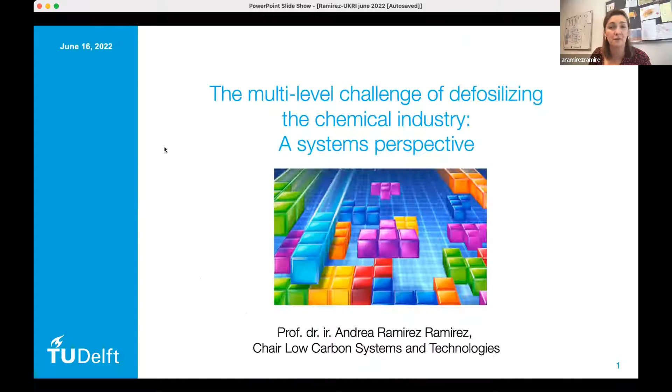I will not spend a lot of time on an introduction, but we know why we are doing this. The amount of greenhouse emissions that has been currently emitted into the atmosphere is large and increasing, despite coming out of a COVID situation.

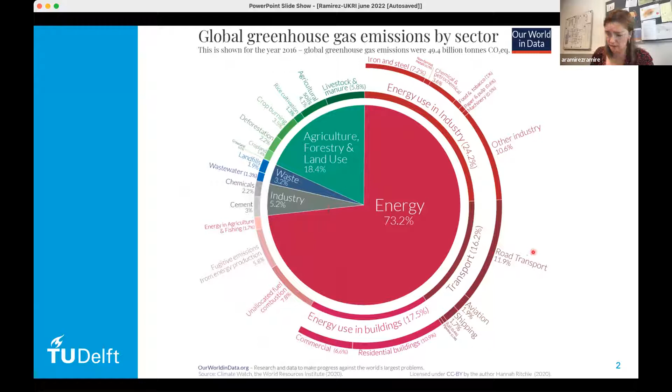If we look a little bit at... let me just have my pointer as a laser pointer. I don't know why it's doing this.

I just borrowed some of the slides from the IPCC sixth assessment report.

I'm not going to go again into details, but it's quite clear that if we want to avoid large impacts from climate change that we are already feeling today, we need to decrease our emissions.

We hope to be able to decrease it to keep a target increase of 1.5 degrees. 2 degrees is already taking us to quite a lot of impacts. And this figure just says, what's important is...

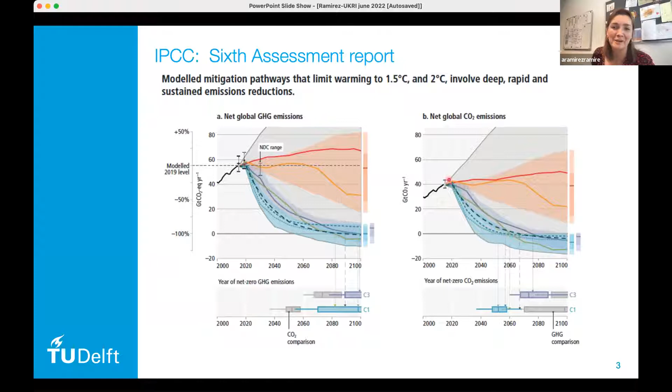Regardless of whether you are going to reach net zero 5 or 10 years later, we need to decarbonize very, very soon, and we need to do that in all sectors of the economy. So unless we have immediate and deep emission reduction, 1.5 degrees is beyond reach.

Some people are already concerned about whether 2 degrees will be within reach. So that's a little bit of an alarming situation.

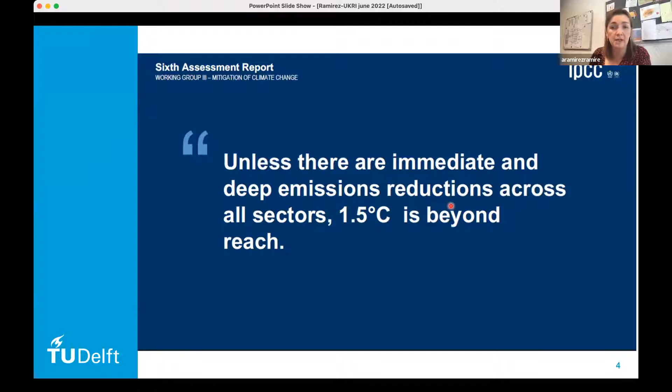And we also know that there is no silver bullet. We know there is no one option that will take us there, but it's a combination of options that makes the system, or the challenges, a little bit more complex.

And this is what in the 6th assessment report they have said industry needs to do: using materials more efficiently, reusing, recycling, minimizing waste, using low to zero greenhouse gas production processes. And they also recognize that achieving net zero is very challenging for the industrial sector, so there will be a need also for negative emissions, even if it's just to do some compensation and later to actually take down historical emissions.

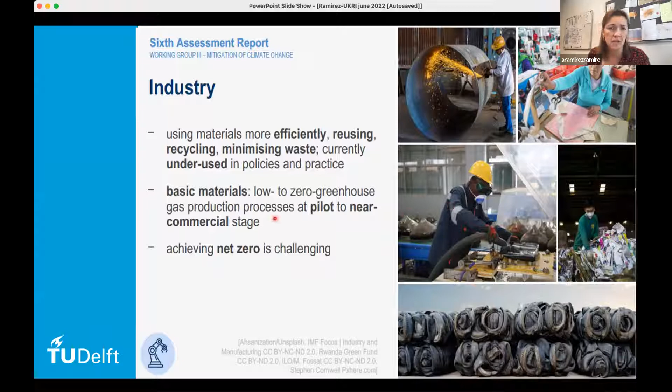Now, these are a lot of options. I'm not going to focus on all of them, but I'm going to focus most of this talk on something that UKRI is also working on, and it's around defossilizing the chemical industry by using alternative sources of carbon. And I'm not using the word decarbonizing on purpose, because most of the processes that we have today contain carbon - the paints, the rubber, the fabrics, the plastics that we use, they have carbon in the molecule. So what we want to do is change that source of the carbon molecule, to have the carbon not coming from oil, natural gas, or coal, but maybe using biomass, or can we use CO2, or can we use, for instance, waste? Plastic waste is one option that is being currently discussed.

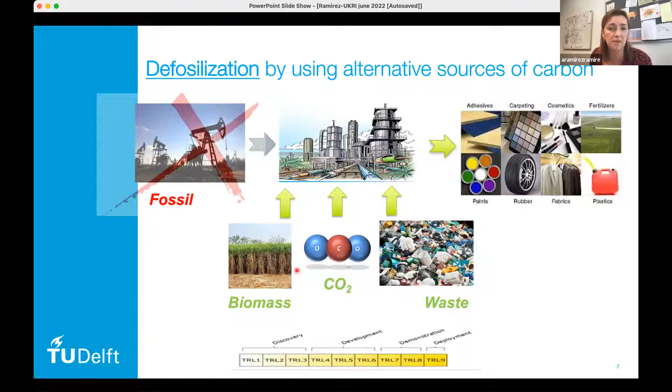All these new technologies - and you have here the technology readiness level, which will tell you how far along the technology is before commercialization - are what we call early technologies. Many of them are just in the lab. Some of them are in pilot and just moving towards demonstration, but not yet there. So it's a bit of a rush trying to see how can we take those promising technologies, and what are the impacts of doing so.

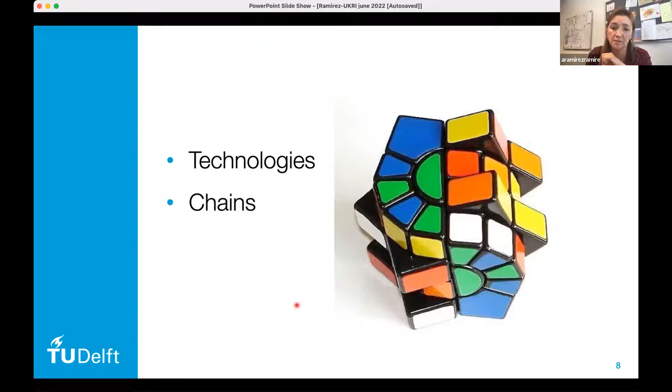So what we are aiming to do on one side is developing technologies. We also need to implement value chains that take from raw material to product. Some of them we can use value chains that are already available. For many of them, we will need to design new value chains. And then we need to have full systems. And by full systems, I'm speaking beyond the company - I'm speaking about the logistics, where the raw materials come from, how my interaction is with other systems, enabling infrastructure that will be required, etc.

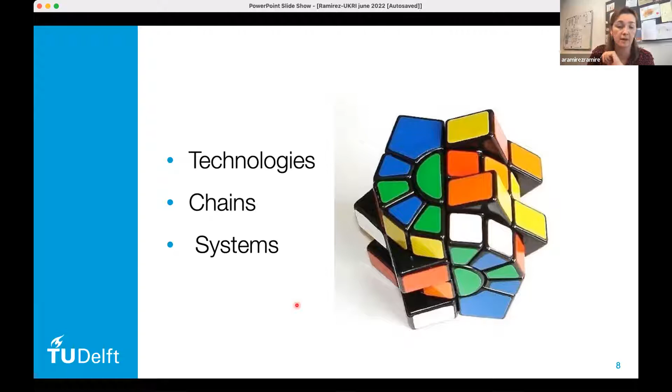Now, I love the work we do, but I know UKRI also does it. It's called ex-ante technology assessment, and it's about whether we can do something with the knowledge we have for those technologies at lab level, and use that knowledge to really explore what will be the future performance of those technologies. And we do so in order to provide feedback to the technology developers and to policymakers on how to actually develop the technology further. And to do that, we do a combination of process modeling to scale up results from lab to industrial scale. We assess the economics, we assess the life cycle performance, and we also do uncertainty analysis. We tend to do ex-ante technology assessment by taking a value chain approach, that is, to look from raw material to where the product finishes, if possible.

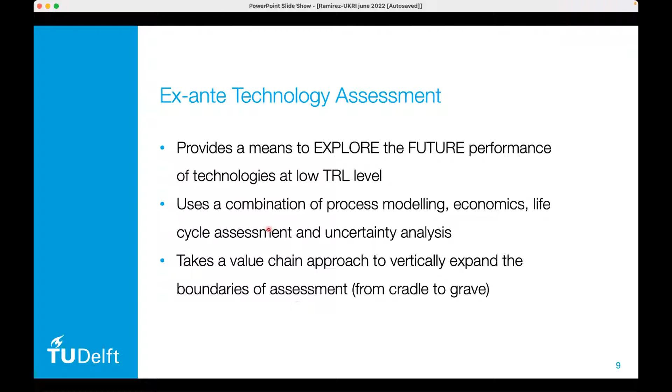Now, I don't know why my cursor is not working, but this was a bit of a disclaimer of what ex-ante technology assessment doesn't do. So we do provide information - it's an exploration of the future, for technologies that are at an early stage of development. That means that we don't know a lot of things. There are a lot of question marks when we are developing the technologies, and therefore there are inherent uncertainties about the information that we are putting into the models.

The highly inherent uncertainty means that the results are not aimed to be looked at to the decimal point. It's not about the performance - I have something at lab scale, at a 50 centimeter by 50 centimeter area, I'm going to design something that works at industrial scale, and I can tell you exactly how much it will cost to the decimal point, or how much energy it will consume to the decimal point. That, I will argue, is not realistic and it's not needed. What we are trying to do is to gain insight into where the bottleneck is, where the problems are, what the order of magnitude is, and can we do something about it, recognizing that there is a lot of uncertainty and a lot of variables that can influence the result. So that is where the challenge comes from.

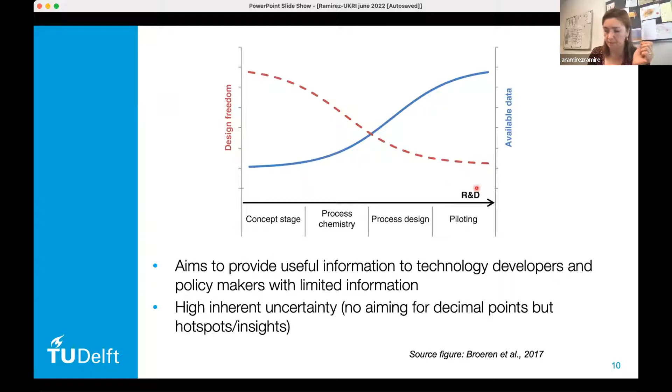Now, that means - and I am part of the E-Refinery Institute at TU Delft, and we look at the transformation of carbon into molecules using renewable electricity - this is one of the typical illustrations that I have.

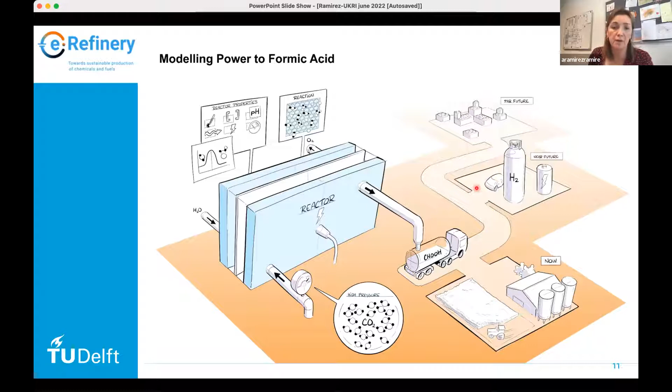And this is just - we are going to go from CO2 to formic acid using an electrochemical reactor. And that's how we picture the transformation for the public. And when I see this and go into the project, the type of questions that I tend to ask are a little bit like this.

So it's not only the reactor what I'm concerned about. I'm concerned where the electricity is coming from, what is the quality, the cost, where is the water coming from, are critical raw materials used, what is the quality of the product, do I need downstream processing to get it to market standards? What is the infrastructure? Do I need new pipelines, electricity, roads? Do I transport by ship? Under which timeline? What are the CO2 impurities that I put into the reactor? Those are system conditions. So even if your reactor is working perfectly in the lab, those are the things that will determine whether or not it can be implemented in practice.

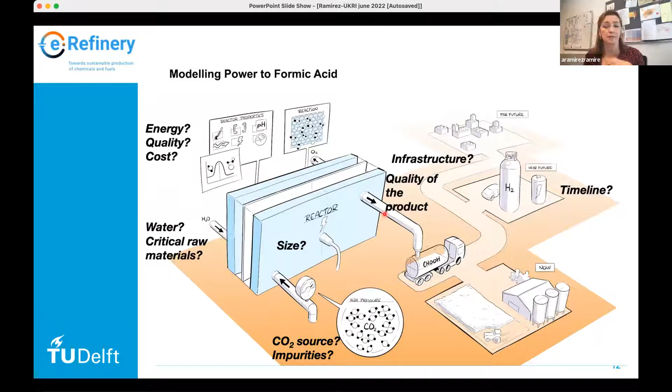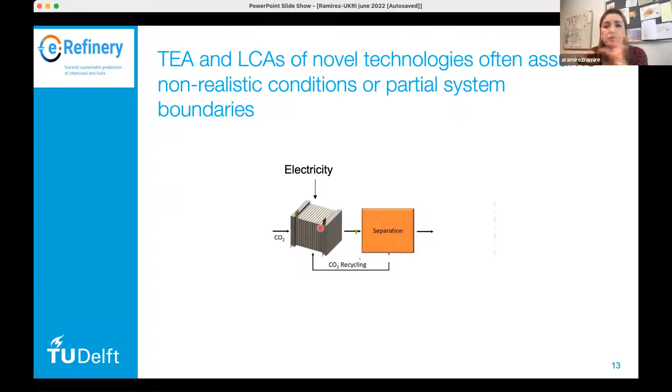So what we notice when we look at a lot of techno-economic and life cycle assessments of these low-TRL technologies is that they tend to assume unrealistic conditions or partial system boundaries. And what I mean by that is, for instance, in the case of electrochemical conversion of CO2 into product, many studies assume that the energy is simply there.

I have seen people speaking about an unlimited amount of energy that people will pay to provide. Yeah, maybe at some point, some time, but not on a permanent basis, because a power company still wants to make profit. Or they tell you the electricity is renewable, coming from intermittent sources, while the assessment actually assumes 24/7 operation.

They tend to assume that the CO2 feed is free, has no environmental footprint, and is pure. Some studies don't take into account that you need to do a lot of cleaning of the product coming from the electrolyzer to actually get the final product. And some LCAs assume that the use phase is exactly the same as the petrochemical counterpart, which may be true in some cases, but if you change the way you use the product, that may not be the case.

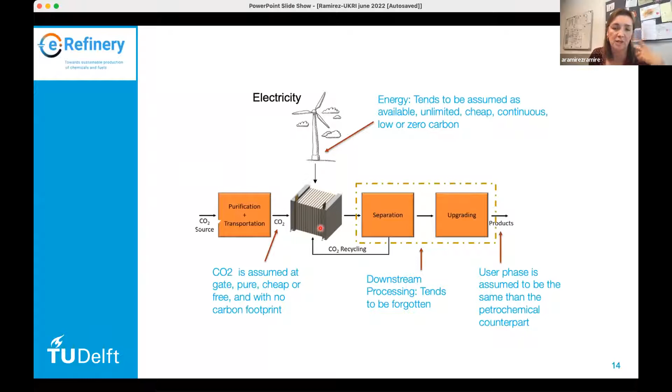Now, I'm not going to go through all of them because there are too many, but some of them just to give you food for thought, because these are system challenges. One of those is: does impurity in CO2 matter? Now, my answer to that is, it depends what you want to do with the CO2.

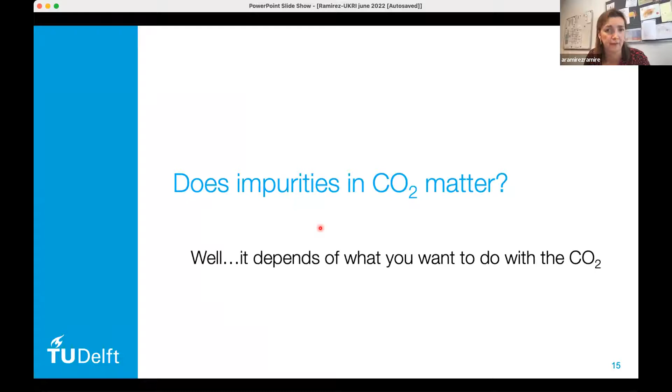These are typical compositions you'll find in literature of fluid streams coming out of a capture unit, whether after a coal power plant, a natural gas power plant, a cement plant with post-combustion capture, a refinery, a bioethanol plant, or even direct air capture. And you see it changes a lot. So if you want to do something like mineralization, converting the carbon into carbonates, that is generally the least sensitive to impurity. You can even put flue gas there, no problem.

But if, on the other side, you want to do electrochemical conversion of CO2, then questions come up. Can I put mercury there? If I speak with a lot of experts, they say, please, no mercury, not even at the ppb level. Can I put sulfur there? Can I put NOx there? Can I provide chlorides, since that comes from biomass CO2?

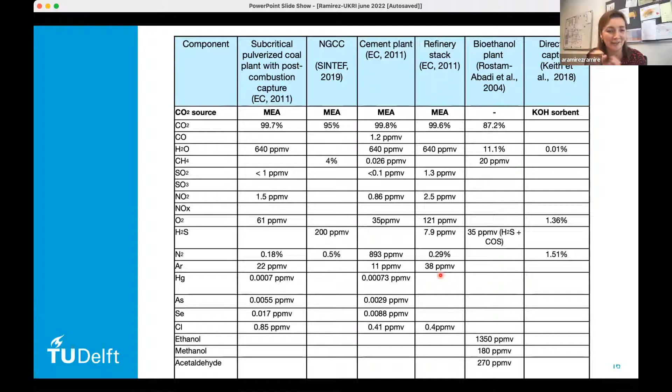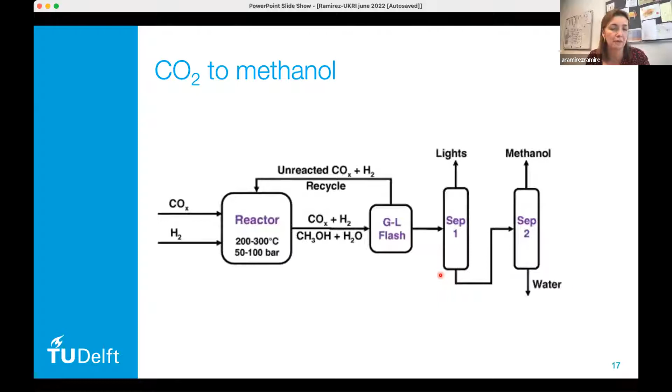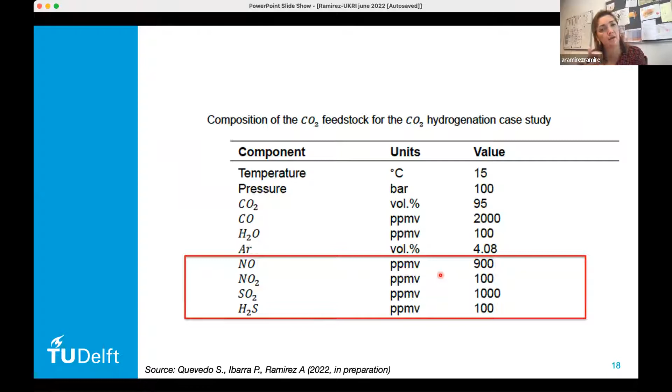So we did a little bit of an exercise to try to compare two different routes to produce methanol. We assumed a CO2 feed with these impurities, and looked at how it would affect, for instance, the techno-economic assessment. I'm not going to show you all the process design and techno-economic analysis, but for this webinar, just to tell you that it does matter, at least in this first assessment.

So we were comparing those two systems to produce methanol, one using CO2 hydrogenation and the other going via gasification of plastics to methanol. And what we found, when we wanted to use CO2, is that the CO2 purification system we needed was around 25% of the levelized cost of methanol. That is a large amount for a novel technology. Whether it's 25 or 26 or 30 is a little bit irrelevant, but it's not insignificant.

This can be done with technologies we have today, that's not a problem, but it does affect your CapEx, it does affect your competitiveness, it may affect which source of CO2 you want to use. And if you change the source of CO2, you may want different infrastructure, different regulations for CO2 transport—there are many system implications. So all I'm saying is that is an aspect you cannot overlook.

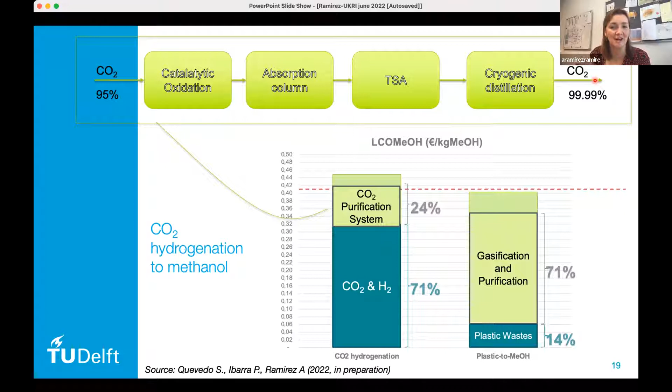And we need people to actually do experiments with impure CO2. That will be a call for all of you doing lab work: try CO2 with different impurities. The more robust the technologies are, the fewer problems we will have at the system level.

The other thing people are doing a lot, and we are discussing a lot, is intermittency. So we hope that in a couple of years—maybe I'm a little too optimistic—but by 2050 we will have in Europe a fully renewable electricity system. Let's assume that is the case. Then the question that comes to mind is, what does it mean for new processes?

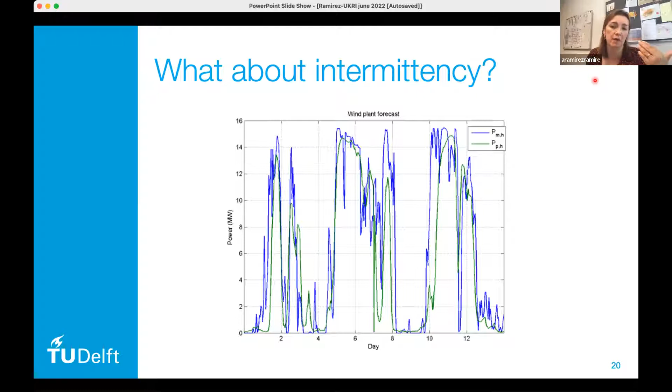So what happens if we have a lot of these CO2-based processes, electrochemical conversion running on electricity, and you have this intermittency? Can we evaluate the impact, and can we design the process accordingly? To do that, we got a project partially subsidized by Shell and the Dutch government to look at what flexibility means when designing flexible novel chemical processes, how different levels of intermittency affect economics and environmental trade-offs, and how significant system conditions are for this.

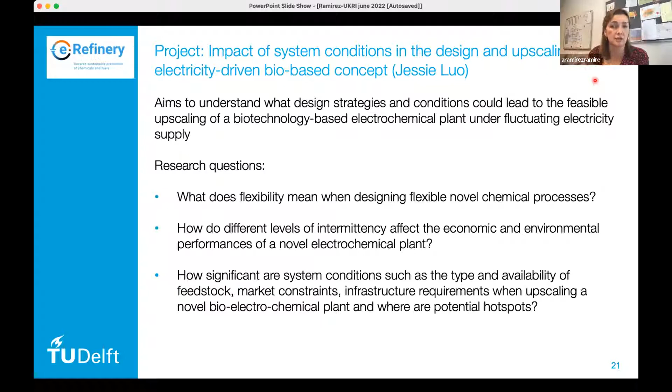Doing this, we did a review on what flexibility means for the chemical industry. We found quite a few problems in terminology—people using the same name for different things, or different names for the same thing, which makes it hard to understand what people are referring to. So we published a paper on what flexibility means and how we could develop a conceptual framework for it.

Now, of all the kinds of flexibility you can have, the focus in this webinar, what I'm going to tell you in the next slide, is about volume flexibility. That is because in an electrochemical reactor, if you vary your electricity—which you can consider a feedstock to the reactor—then your output will also change. So the ability to vary throughput, we define as volume flexibility.

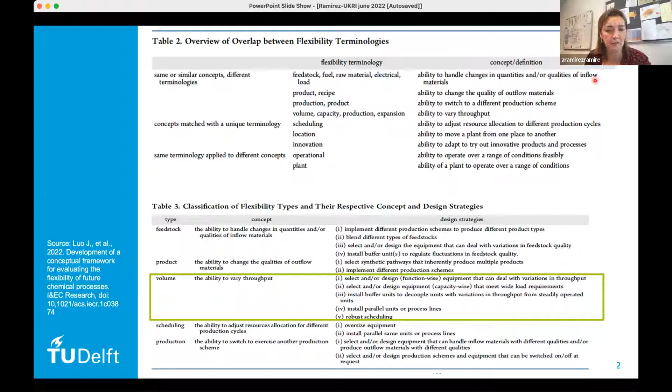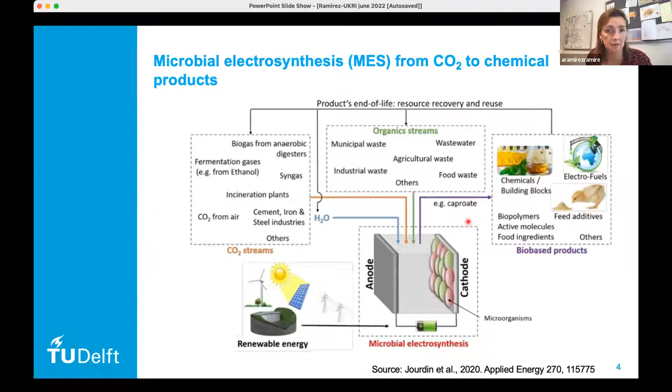At this moment, JC, my PhD student, is working on microbial electrosynthesis from CO2 to chemical products, especially caproic acid. This technology is developed in the Faculty of Applied Science by the group of Ludovic Jourdin, who is doing the lab work and scaling up. So you basically put in renewable energy, CO2 and water, and at the cathode you have microorganisms that do the conversion, producing, for instance, caproate or caproic acid, as we are currently analyzing. We are using this as a case study to understand how to design flexibility.

And then we say, let's assume that electrolyzer—which is an assumption—is completely flexible. What happens afterwards? What happens with the rest of the plant? Will that be a bottleneck? And the answer to that question is yes, it will.

So you have to assume, for instance, these bio-based products produce very diluted products—in this case, 10 grams per liter of caproic acid—and you need to sell it at 99%. So if you want to do that, you actually have to remove a lot of water from the system.

To do this, we use liquid extraction to be as energy efficient as possible. And then we spent, I think, a year trying to understand how to model the flexibility of the different units to find where the bottlenecks are. Here you see which units consume the most heat. It's not such a simple system, and the economics are also problematic.

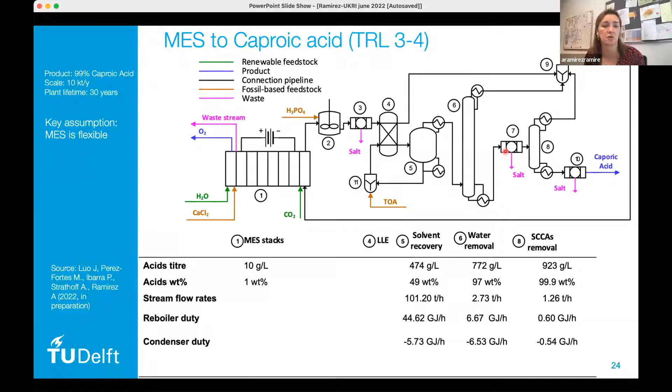When we wanted to, that's what she did, she changed the amount of electricity going into the system, which changed the load rate going into the different equipment. As a consequence, your equipment is not working at design capacity, so it's working at different capacities, and every piece of equipment is different from others. Some equipment are more resilient, while some you really need to keep close to the design system.

Jessie was this week at the ESCAPE conference in Toulouse presenting the results of this part of the work. What we found is the volume flexibility of the downstream processing was 70%. That means I can vary my load rate by 30%, and the equipment will still work, but it will not be as efficient. It will have a cost - you are operating a bit more inefficiently, but you could operate.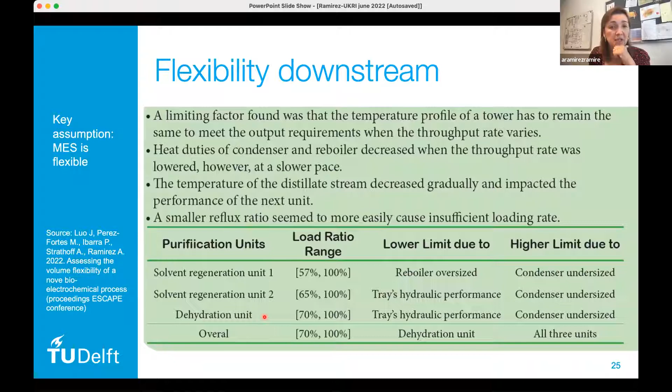Below 70%, my equipment starts having really big problems, especially the dehydration unit, and therefore I needed to shut down. If you consider a profile like this of a wind plant, without doing anything about this design, you will be shutting down 3,700 hours a year. If a year is about 8,760 hours, you are shutting down quite a bit of the time, and that will kill your economics. This is a CapEx intensive process, so you would like to run it as much as possible.

So the second question, which is what she's working on at this moment, is: how can we increase the running time if you have this kind of profile? You can do several things. Remember, in our assumption, the MES is flexible, and we only have the possibility of intermittent renewables. One thing we try is to further electrify the downstream processing using electrodialysis as a pre-concentration step, which has been done. The other thing we're doing is adding batteries and buffer tanks to try to minimize the variability, and then do a techno-economic and life cycle assessment to see what happens.

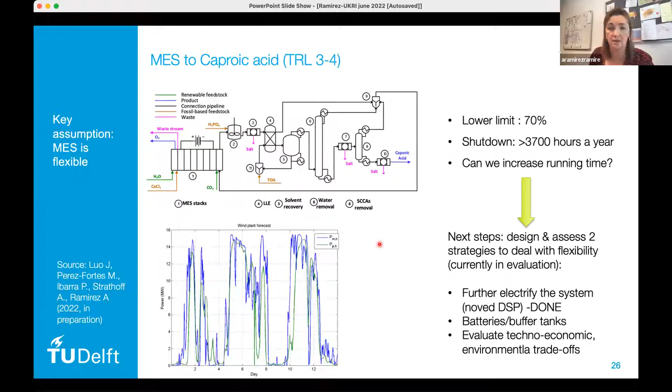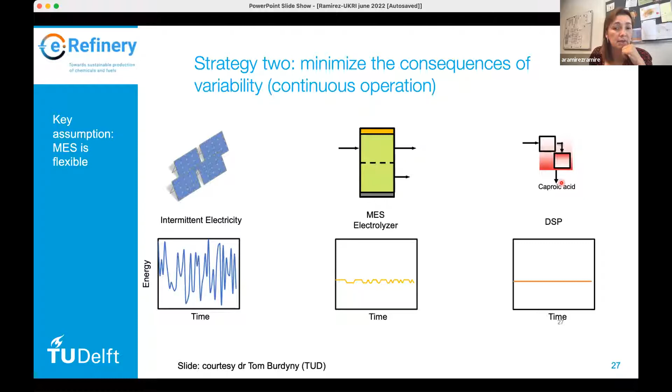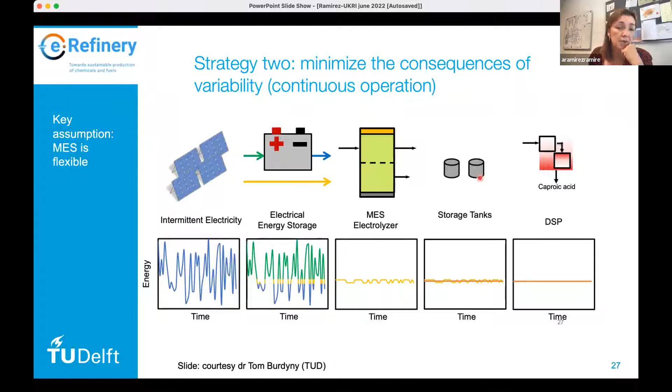So basically, you have intermittent electricity on one side and caproic acid on the other. You have an electrolyzer in the middle that doesn't accept as much variability, so we will put in a battery to reduce the variability, and then some storage tanks. You can make the battery very big and the storage tanks very small, or the battery small and the storage tanks bigger. All of this influences your CapEx and OpEx, and also the physical footprint of the plant - you can end up with storage tanks bigger than the plant itself, which you won't like.

So this is what we are optimizing at the moment, and we hope to have a paper with the results by the end of the summer.

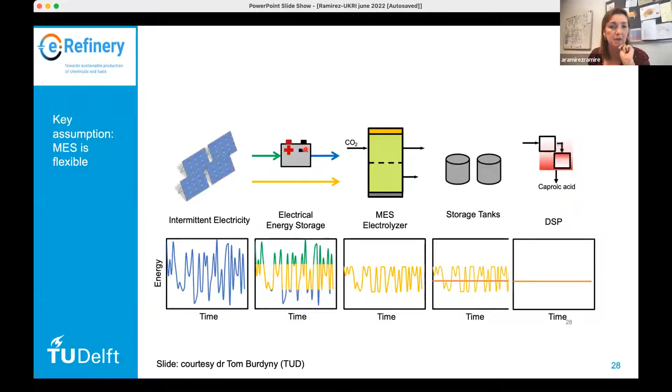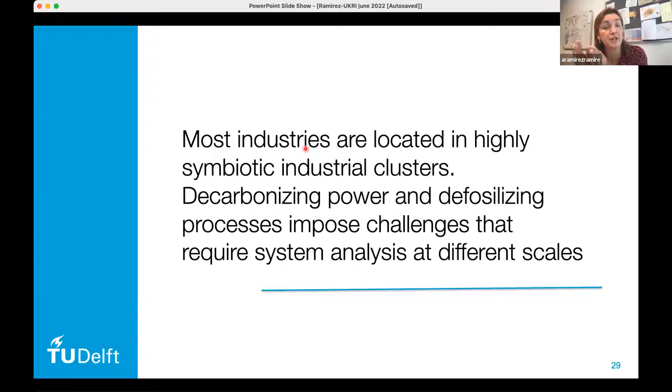Now in the second part of this talk, I've spoken a bit about what happens with these technologies when you treat them as standalone. But reality is, if you go to the UK to different industrial clusters, that's where industries are located. Most industries are located in highly symbiotic industrial clusters - they are not isolated, with some exceptions. At least in Europe, in the Netherlands, they are really clustered. Therefore, decarbonizing power and defossilizing process imposes challenges because of the interconnections that happen at different scales.

So let's assume you do an evaluation of a novel technology for the petrochemical industry. Generally what we tend to do is what we call transmaterialization using a vertical evaluation - you take the current system and have a portfolio of technologies, A, B, and C. You do your techno-economic and life cycle assessment for each individual route, compare the performance, and choose the best one. You say, to replace the fossil raw material, I will use option C, for instance, because it has the lower cost and higher avoidance of CO2 emissions. That's okay, it gives you a lot of insight, this pairwise comparison. It does assume, most of the time, that you are in a green field where you are just comparing two novel technologies.

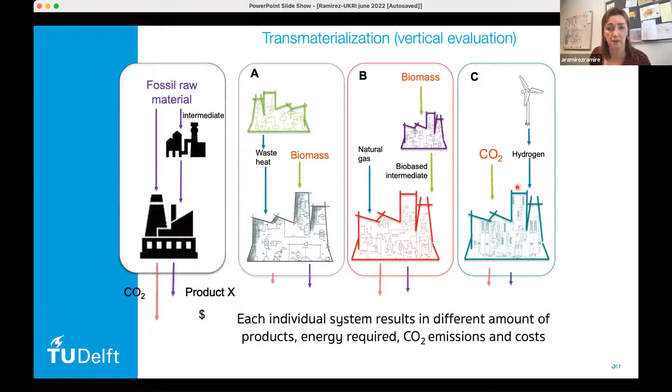Now, what we've done in the next project I'm going to introduce is say, wait a second, this is good, but that's actually not how the industry works today, especially the chemical industry. So this industry I'm trying to defossilize in my system - if I go to the location, I may realize that the company using fossil fuel is actually providing waste heat to a second company, just selling the waste heat, to produce a different product that has nothing to do with my initial product.

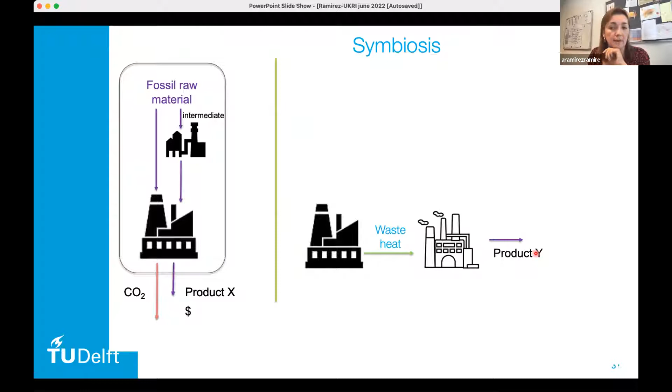It's just selling the waste heat. What happens when I actually take out the fossil process and put a new process, for instance, that would make it out of CO2 and make it with renewable electricity? Well, that waste heat will be affected, most likely disappear. And then what is the second company gonna do? Is it gonna use natural gas in the worst case scenario without CCS? That will imply that all I have done is shift my emissions from company one to company two.

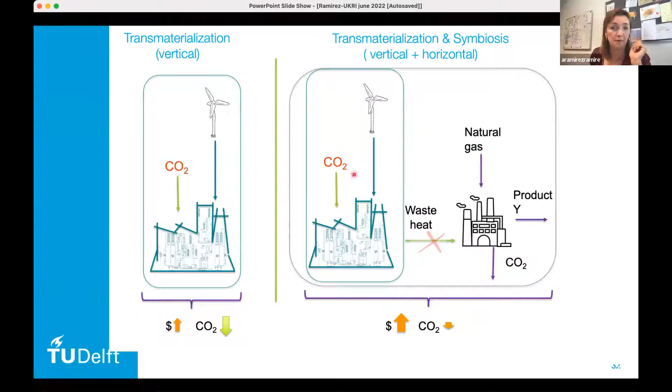Can this be solved by this one using a lot of heat? Of course, but it's not like all the companies speak all the time to realize if I do A, you will do B. It may be that this will be the option of the second one, and therefore you have invested a lot of energy here, but only move emissions at a higher cost at the next site.

So to assess this, we have gotten a project, which is a personal grant I got a couple of years ago from our Dutch Research Foundation, to look at the impacts of using alternative raw materials in industrial clusters. We wanted to be able to assess both the vertical impact from life cycle assessment and the horizontal impacts from symbiosis, and try to understand how flexibility or integration in the industrial cluster or symbiosis could be affected by this transformation.

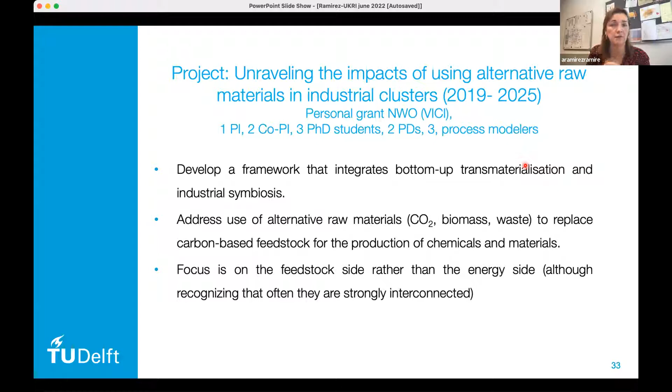So in which way, for what kind of companies, what kind of technologies or new technologies do they affect in the same way, or do they affect in different ways? The focus of this project is not on the energy side, although energy is of course a consequence of the model, but we are really focusing on changing the source of carbon in the cluster.

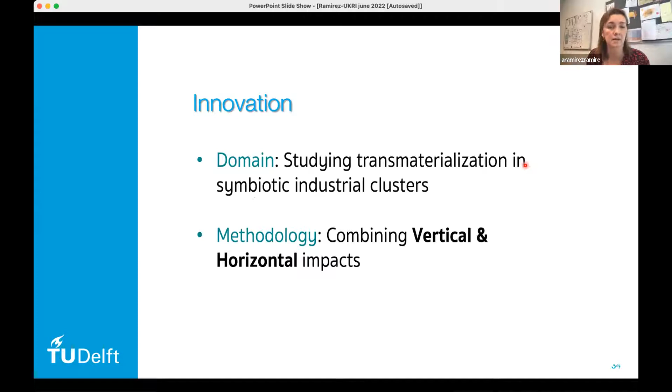So what is new in this project is that we are studying both the vertical and the horizontal impacts, and we are studying the transmaterialization of clusters. And because I have here in my backyard the Port of Rotterdam, that is the example that we are taking as trying to model.

The Port of Rotterdam is only 40 square kilometers in area, and it has 5 refineries, 45 chemical industries, and 5 biorefineries. So you can imagine how concentrated and interlinked everything is.

So the first step, which took us almost 2 years and we have completed by now, we have developed a twin representative model of part of the Port of Rotterdam. We have selected main processes, main products and byproducts that exist in the port. We have kept the production capacities that exist in the port, and we are mimicking the real interactions between different industries that we see in the port.

In our toy model of the cluster, which we are going to call the baseline cluster from now on, we have modeled 6 industrial sites with 20 different companies, around 57 chemicals. We have grouped them as they are grouped also in the cluster in Rotterdam.

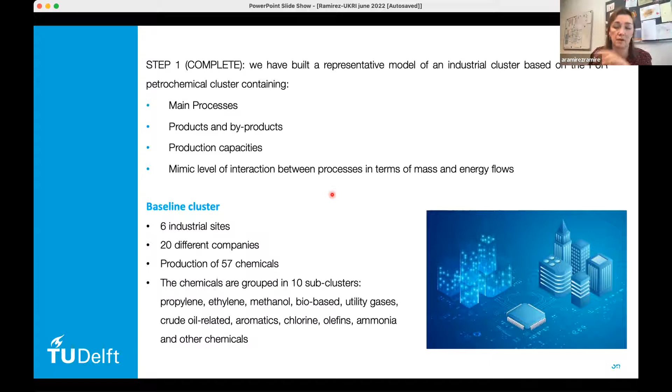I would like you to know several things because it allows you to understand a little bit what we are doing. Every petrochemical process has been modeled as an independent model. So it's not a super model in terms of optimization of the whole cluster, but it's a modular model. Why? Because that's the way the cluster works - every company optimizes for themselves, not for the whole cluster.

We are modeling in Aspen, so it's process modeling bottom up. The individual models already provide us quite a lot of insights because it allows us to get really energy and mass balances of today's condition. We can get emissions, we have area footprints, we have equipment costs, etc.

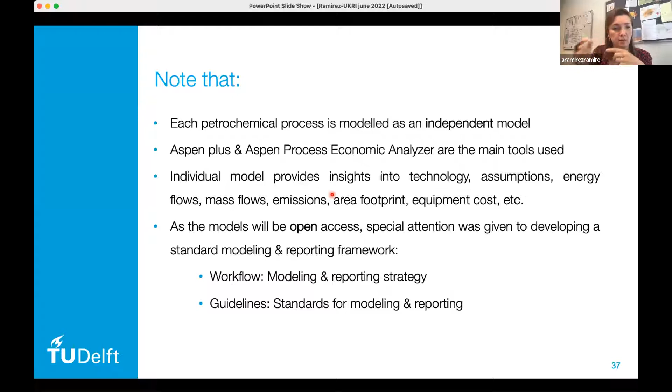And we are going to make the whole model open at the end of the project. Therefore, from the very beginning, we spent quite a bit of time developing modeling and reporting strategies that all the modelers involved in the project are following, so that regardless of which model you open, it has been modeled in the same way. So this is a little bit how the whole model looks like.

I know you cannot read a lot of the boxes, so if you allow me to zoom in a little bit - this is what we call the chlorine subcluster, and the boxes you see here are individual models. All the arrows you see are main products - for instance, chlorine produced in the chlorine company here is being used to produce ethylene dichloride in this company here, and so on and so forth with all of them.

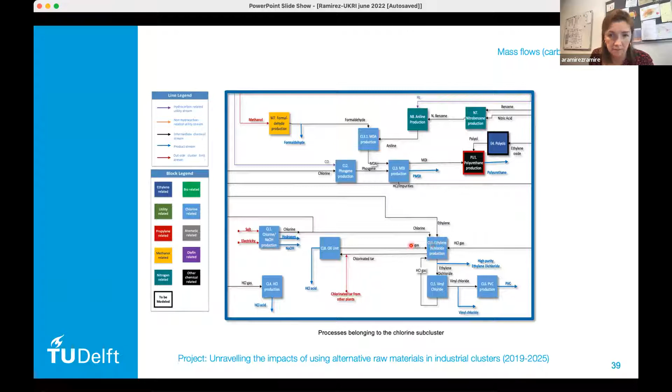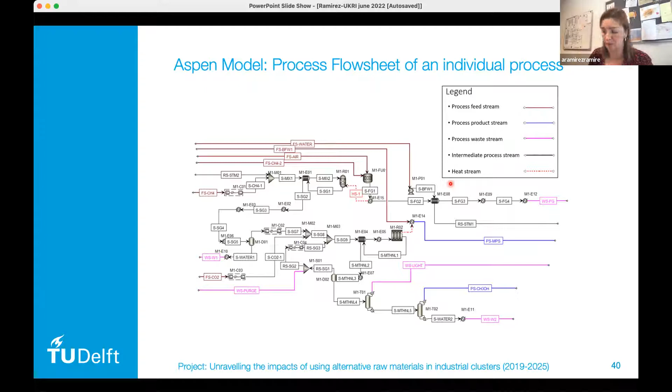So if I zoom in again, in one of the boxes, you will see an individual Aspen model of that process that we have verified to be representative of what we have found outside. So how do we do that?

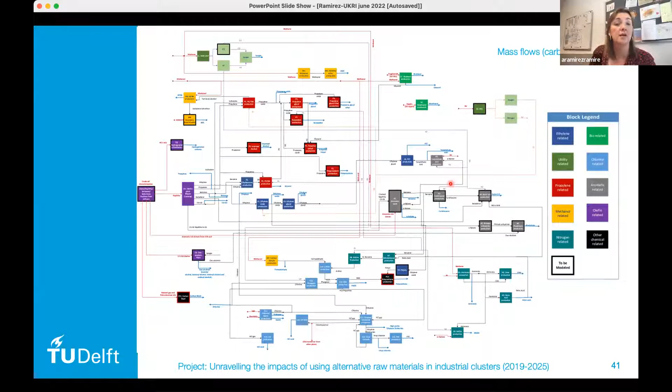We have people looking for several years at all kinds of reports, websites, books, and permits that people ask when you have to submit a plan for a permit from the government. Some of the information is open, and you use all that to try to mimic as much as possible of what's going on.

But in a cluster, companies are interconnected by more than only the main products I just showed you. So Paolo Ibarra, a postdoc in the project, spent quite a bit of time trying to map all the utilities shared between companies in the real cluster so we could mimic them in our toy model. We're speaking about things like oxygen, argon, nitrogen, steam, waste fuel, or water.

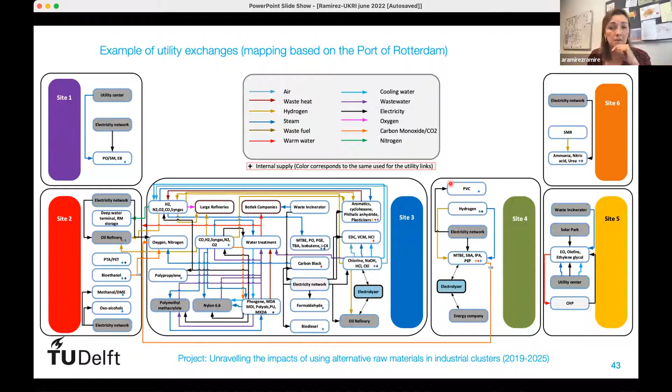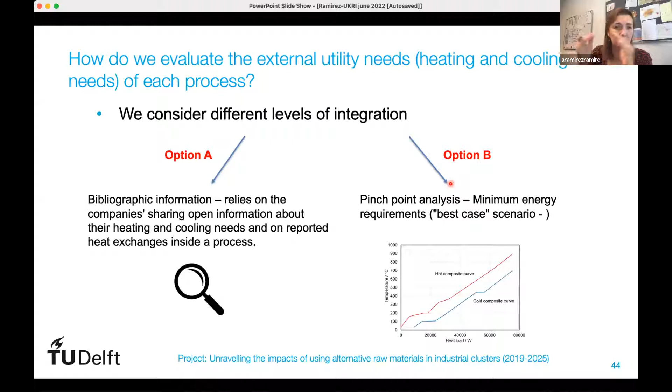It's quite a lot of digging for information to try to reflect the complexity so we can actually assess the impacts. We have energy flows, and we've also modeled the utility islands of the different companies using information from literature, and conducted a basic pinch point analysis to understand whether we are underestimating or overestimating the amount of energy used by the companies.

We compare the energy from the process models with the energy we found in reports from the companies, and try to see when they are close, when people are buying energy, and when people are producing energy inside the cluster.

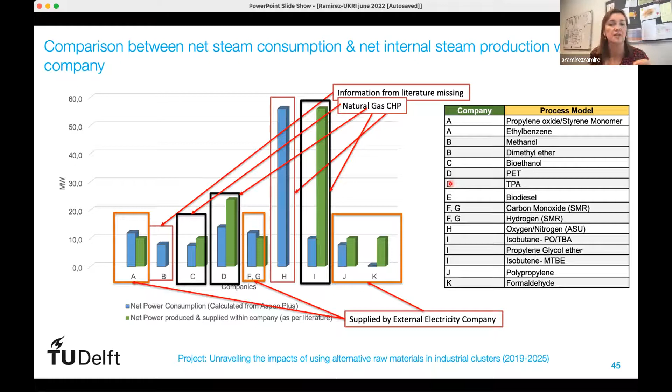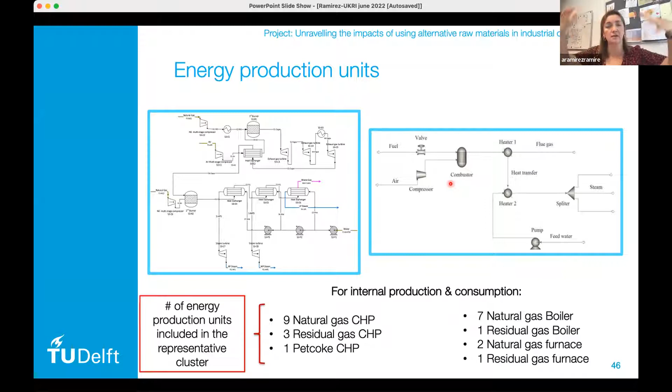Based on that information, we developed 24 models, which are the energy production models in the system. Not to confuse you, but we have individual utility islands that give different kinds of steam or electricity to different companies, and apart from that, we have what is bought from outside our cluster.

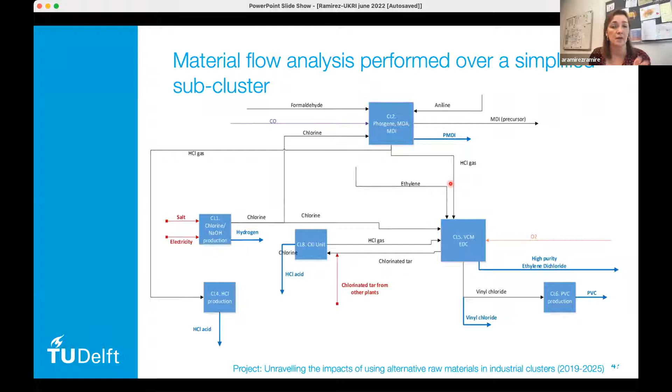Why do we want to do all that? Now that you have this model at that level of complexity, you can do things like material flow analysis for the whole subcluster or the whole cluster. This is an example of a subcluster that was done by Michael Tan.

You see here, for instance, you can do network representation, and with that you can use a lot of graph theory to analyze where the most important nodes are, where carbon is going to, where it's moving from, which are the most interconnected paths, and which are the isolated paths. So you can also do risk assessment.

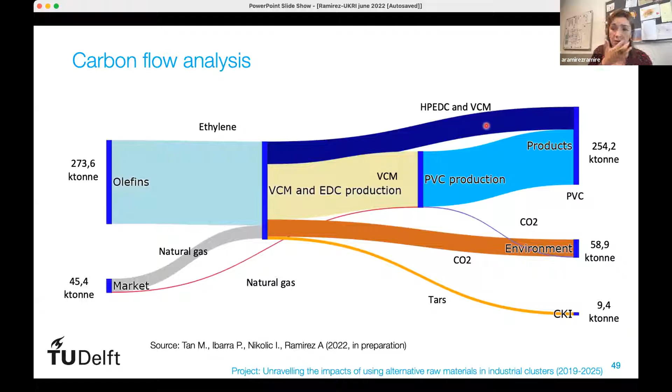You can do carbon flow analysis, telling you where the carbon from the olefins is going, who is using the most carbon. Remember, this is only for the subcluster, but we are able to do this for the full cluster.

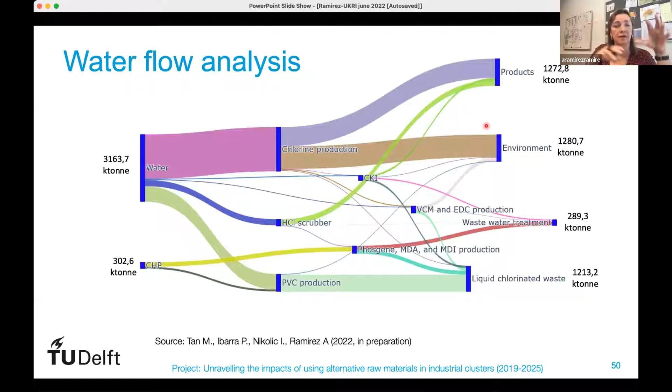We can also do water flow analysis. So you're able to get information at the system level about how things are distributed in this cluster that you could not get otherwise.

Now that we have that, I have three PhD students working on this model. Tonny is going to be looking at decarbonizing chemical building blocks, to see what happens when I change my ethylene or propylene and how the impacts propagate in this symbiotic cluster.

The other PhD, Inna, is going to be looking at what happens when we transform the downstream processes. So instead of changing ethylene directly, I'm changing the way I produce PET, or doing something different on the downstream side, because the impact propagation upstream is different than downstream. At least that is the hypothesis we want to prove.

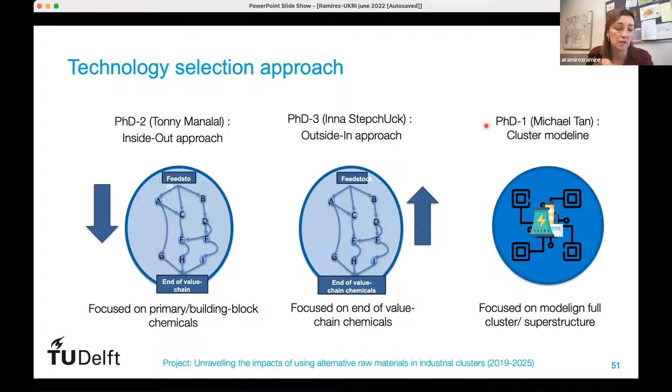And then there is another PhD, Michael, who is joining all this together and doing more full modeling using superstructures to understand how the paths move.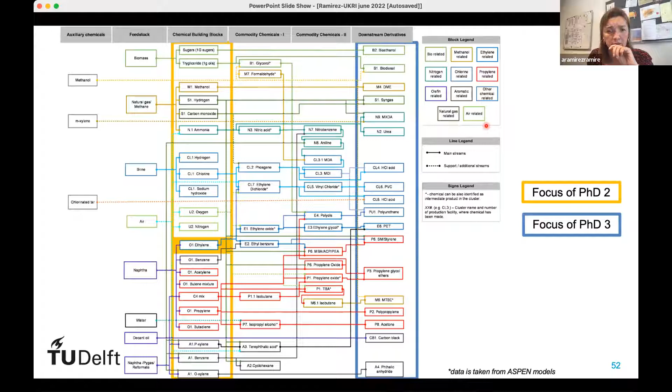So, as I said, Tony is doing the chemical building blocks, and we are starting right now with decarbonizing ethylene. Ina is at this moment looking at MTBE — I think this is her first case study.

What they are going to do is select sixteen products in total: 8 chemical building blocks and 8 downstream derivatives. For each, we select one alternative of how to produce ethylene from CO2, how to produce ethylene from biomass, and how to produce ethylene from waste, then do the same with the different chemical building blocks, giving a total of 48 alternatives you can put in the model.

To do that, you need to develop a pre-screening methodology, because there are many ways to produce, for instance, ethylene or propylene.

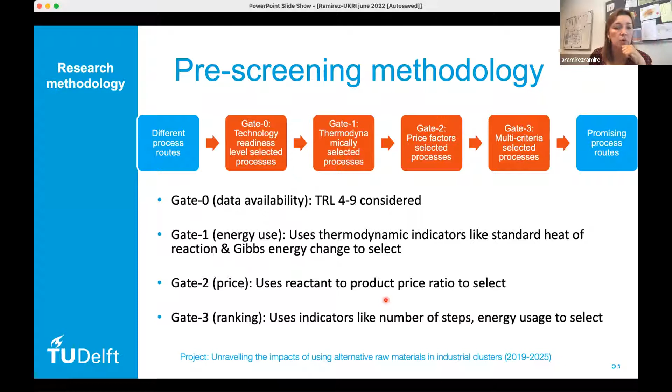We needed to do systematic work on how to select things, because we don't have the resources to model every possible technology needed for the goal of the project. As an example of how complex it could be, this is part of the mapping that Tony Manalal did to understand which pathways were there to make ethylene from alternative sources of carbon. We found 54 possible pathways, and that's part of the challenge the industry has today: how to select from these big clouds.

From here, we select 3 routes: one from CO2, one from biomass, and one from waste. Then we do a model at the same level of detail, Aspen-based like the original one, and replace it in the cluster, and we are developing the methodologies to look at the impacts.

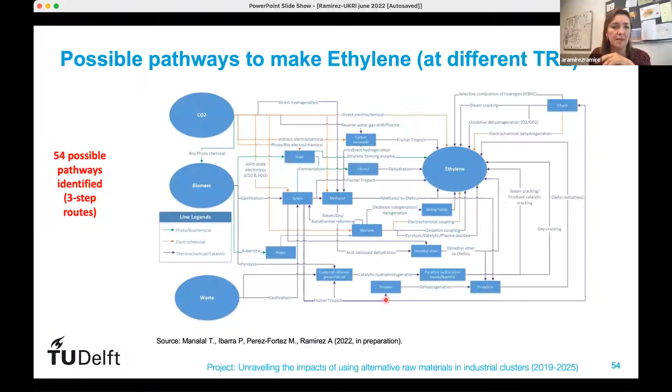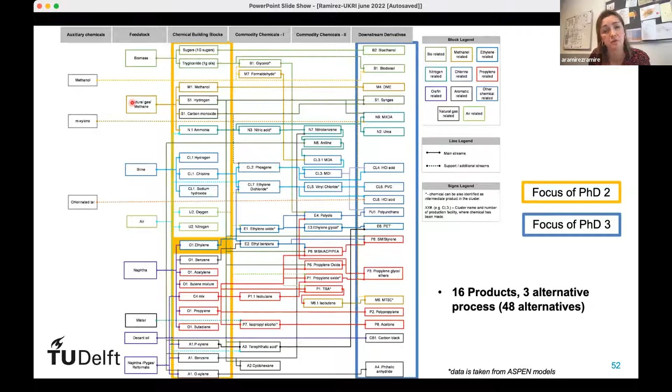Something I forgot to mention: if you look at this cluster, there are things coming from outside it, feedstocks not produced in the cluster, so we have linked the model to a life cycle assessment, to the EcoInvent database. Every product that goes into the cluster has an environmental footprint. We do that because we want to assess whether decarbonizing, de-fossilizing the industrial cluster will actually just increase CO2 emissions outside our system boundaries.

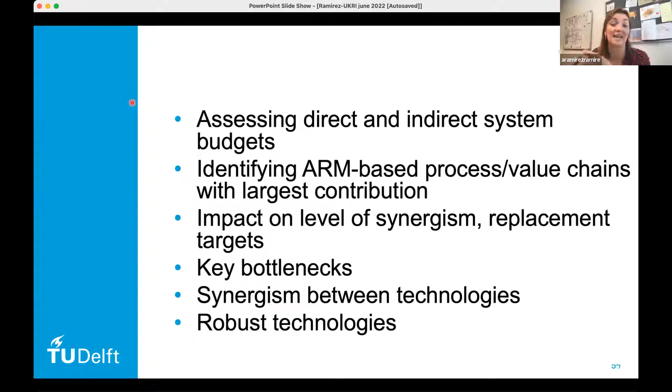We want to look at things like level of synergies, how to replace targets, where the bottlenecks are, whether technologies are playing together, whether you're getting lock-ins, and can we identify lock-ins in advance. We think that's information you will need if you really want to transform the industrial sector radically, the chemical sector especially, towards the targets in 2050.

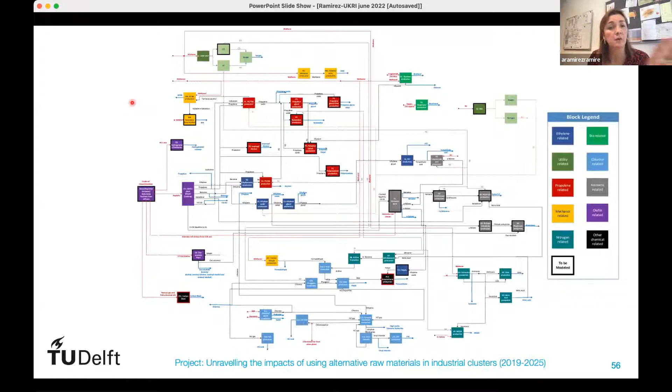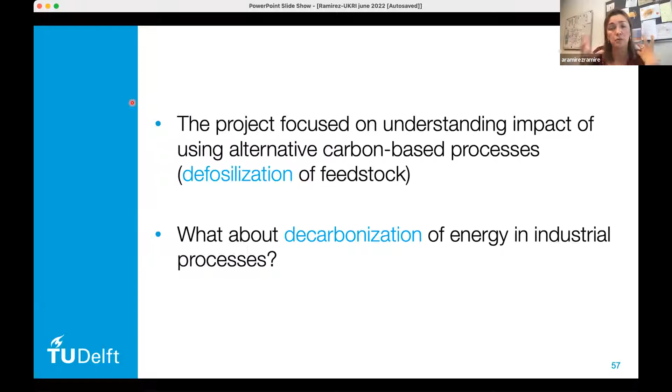Now, the 3 PhDs I described are only working with the mass flows, decarbonizing the mass flows. But what about decarbonizing the energy? Because we already have this map and the whole work put into this model, we can also assess that.

There's a different PhD as part of a different process that looks at how strategies of decarbonization more on the energy side will affect the chemical industry, whether you do it individually or at cluster level. What are the economies of scale that you can actually identify?

She's going to take only the ethylene subcluster of the model, and begin to play with scheduling and power system modeling to really link what happens if I electrify all my steam, or if I use hydrogen, or if I combine the two. She can do that for every individual plant.

Then she's going to do it for the whole cluster, because we also have the geographical distances between plants reported in the model. You can see whether economies of scale or sharing infrastructure will be beneficial, and if so, what and when.

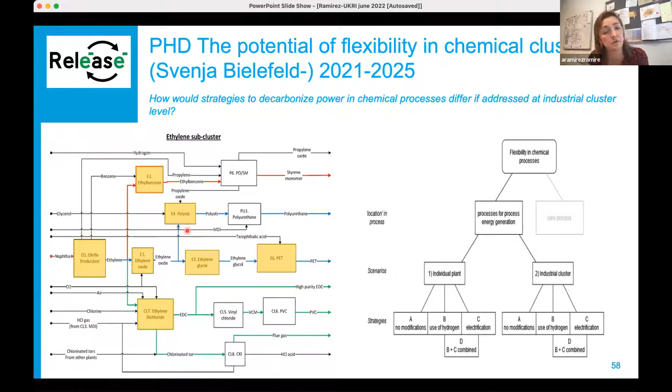She's going to start first only with the utility units, and later look at the models the other PhD has developed to see what happens when you change the process. So a little bit more short term, where you can really move utility units, which will be the simpler option in the short time, compared to a more radical observation of having a completely decarbonized option.

So what I try to tell you is it's a complex picture. I think we are getting a better way of knowing what to do, but there are a lot of technologies in the chemical industry that are at this level.

In order to really understand what happens, you need to go from understanding what happens at process scale, to understanding what happens in the potential supplies, then try to understand what happens in the socioeconomic system, and then figure out how to use this information to send back to the lab scale or demo scale, so we can change technologies where we have the largest degree of freedom at the lowest cost.

And that is when the technologies are being developed. Once they are developed, yes, we can change technology, but that costs money. And sometimes it costs so much money that it makes them unviable for a given system.

So we hope that the methodologies and trying to understand technology from a system point of view will help accelerate the transition of the chemical industry. Even though it looks like I'm putting more problems on the table, I think we have the tools to start treating those problems one at a time, especially if you have consortiums like UKRI, or the work being done in the Netherlands, where we join forces to try to understand better what is happening.

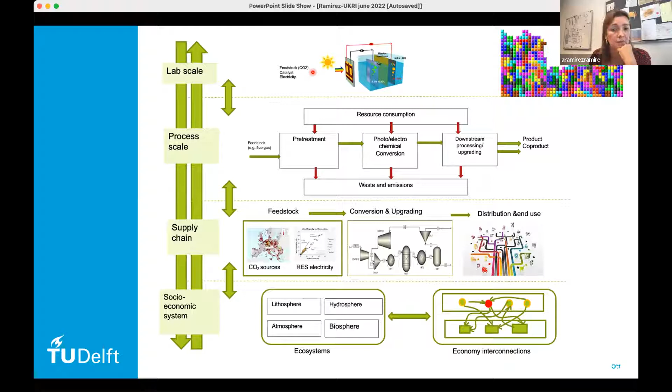And I do not want to finish. We are saying, of course, I didn't do this all by myself, and all the work I presented here is done by my PhD students and my group. I didn't present all the projects we are doing right now, but just a shout out to all the people who have been doing really nice work in the group. And that is it, I don't know how I made time - I speak at Spanish speed and went super fast.

But you're doing great on time, that's why I didn't interrupt you, Andrea. So we have about 16 minutes left for discussions, which is great. First of all, thank you very much - I think we can use the clapping thing on Zoom to thank you for your great presentation. I think it's really an excellent overview of the research projects and ongoing directions in your group. Personally, I'm always very impressed to hear you speak about the digital twinning of the whole Port of Rotterdam - I think that's really impressive.

So once again, I'm asking you to please write your questions in the chat. I see Mehmet Mercangöz, a colleague of mine at Imperial, asking you, Andrea - trying to understand better what is the motivation behind trying to substitute fossil resources as feedstock, because his point is that they don't directly lead to carbon emissions. So he's asking, why do we care about substituting fossil resources?